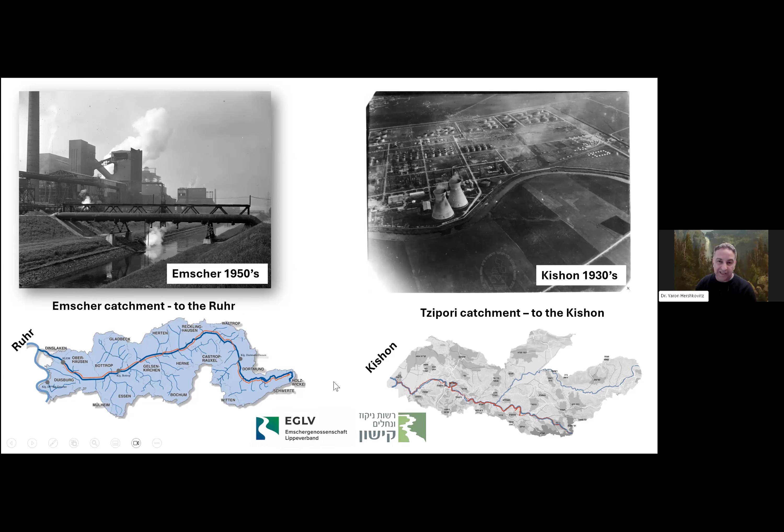אם אנחנו מסתכלים מקרוב יותר על החיבור, כאן רואים את האמשר שמתחבר אל הרור - זה בעצם החיבור בין שני הנחלים. תסתכלו מצד ימין, מה אנחנו רואים כאן? את הלבניות ואזור התעשייה. אנחנו לא נמצאים בקישון, למרות שזה מאוד מאוד דומה, מאוד מזכיר.

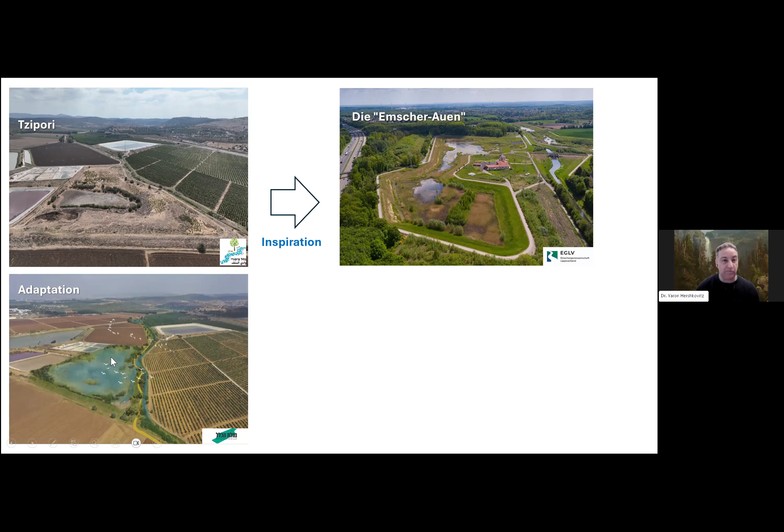ותסתכלו איזה יופי. מצד ימין אנחנו רואים בתמונה את מה שנקרא אמשר אוהן, שזה פרויקט שהושלם לא מזמן. גם כאן האמשר זורם בתעלה מצד ימין, קצת יותר מים, אבל ראינו כבר, אני באיזשהו מקום זיהיתי כבר את קווי הדמיון, ואמרתי, זה נראה מעניין, אולי נקבל מזה השראה. הצילום הזה, יחד עם חלק מהסרטוטים, עברו לצוות של הציפורי, בוצע איזשהו סרטוט רעיוני שמתבסס על זה. הנה, אפשר לעשות משהו דומה אפילו. לא באותם סדרי גודל, לא אותן איכויות, אבל אפשר לעשות משהו דומה.

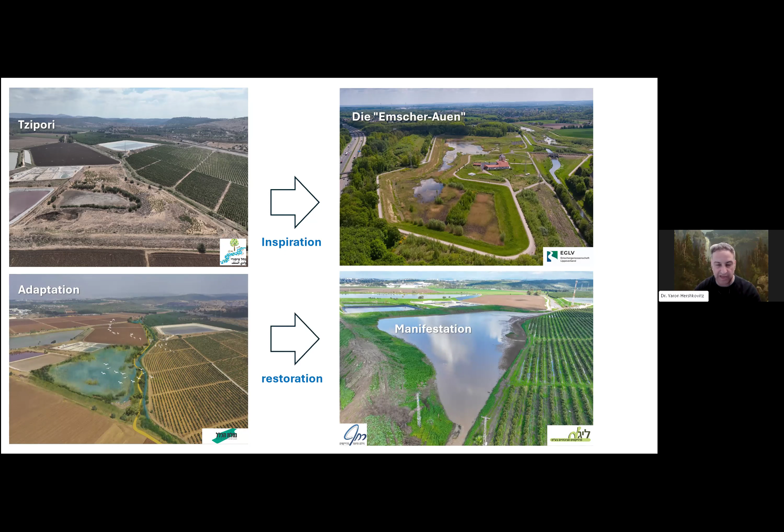ובאמת הרעיון קרם עור וגידים, בסופו של דבר יצא פרויקט - אני לא ארחיב על זה כי זה לא המקום ולא הזמן, למי שירצה יש הזדמנויות אחרות - אבל הנה, לקחנו השראה מפרויקט קיים, והצלחנו ליישם אותו.

אז זו דוגמה אחת, אבל כמו שאמרתי, הרעיון הוא בעצם להסתכל, לקבל השראה קצת יותר רחבה, ללמוד איך לקחו אזור כל כך מזוהם וכל כך מהונדס, ואיך הם התרחקו מה-engineered, מהפתרונות ההנדסיים, שזה מה שהיה, להסתכל יותר לכיוון של nature-based solution, פתרונות מבוססי טבע, ולהפוך את הנחלים ואת התעלות על הנחלים שהיו תעלות, בחזרה לנחלים זורמים עם מים נקיים.

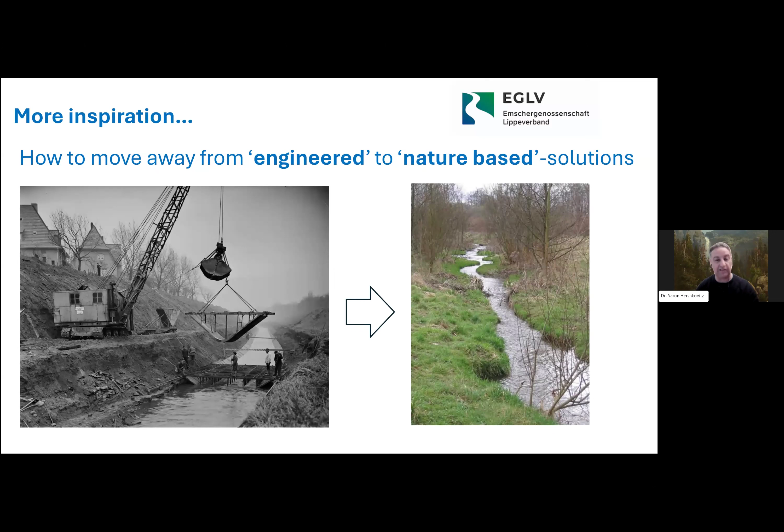זה יכול להיות גם החזון אצלנו בארץ, זה צריך להיות, זה כבר חלק, אבל איך עושים את זה בפועל? פה אנחנו גם צריכים להסתכל מה נעשה בעולם, ולשם כך, I'm happy to host you, my colleagues and friends, Dr. Mario Sommerhauser and Dr. Nadine Gerner, that will give us their insights and their point of view of how to do that, how they did that for more than 125 years. So I leave the stage to you. Thank you.

Thank you very much for the introduction, Yaron. From the pictures, we could also follow the comparisons that you draw. Okay, we also brought a presentation that I will share now. Mario? Yes, I'm listening, but I'm not able to start my video. It says the host has to start the video. If you want to see my face, but I think it's not. Now it works. Now it's working.

Thank you. Okay, yeah, thanks again, Yaron, and welcome to all of you. I have the honor to start this presentation, but we will change the speaker between, and Nadine will overtake later. So it's about the Emscher Basin, and it's also about the Emscher restoration, and of course about the Emschergenossenschaft, a strange word for our water administration company. Okay, let's start.

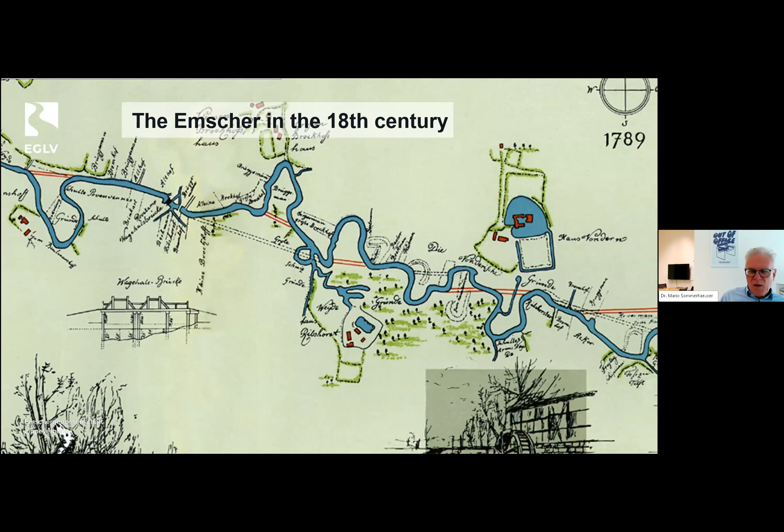The people thought in this period of time about rectification, straightening of the river for mills and shipping, but they were not successful. There were only a few people living in this area, in total 200,000. And this area is today the biggest agglomeration of cities and people in Germany and probably in Europe. Next slide, please. What happened?

In the second part of the 19th century, they started the steel production, and they found also hard coal in this area.

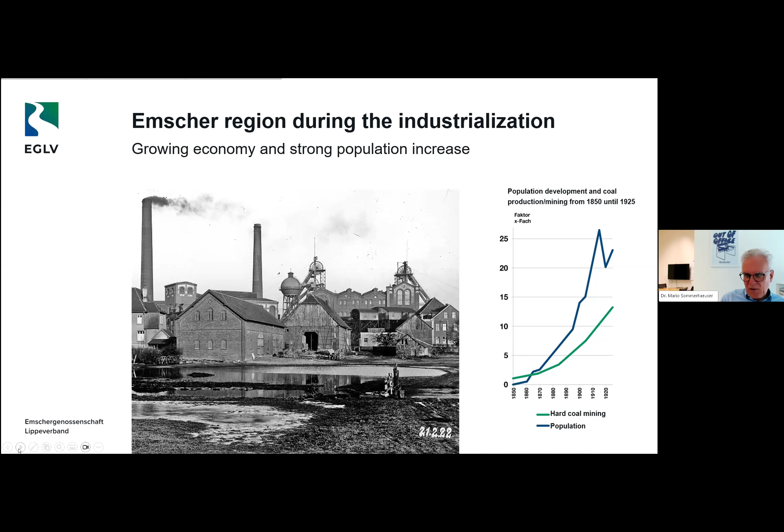Another picture shows the situation. This wooden bridge is not a solution for a moment—it's for the whole year.

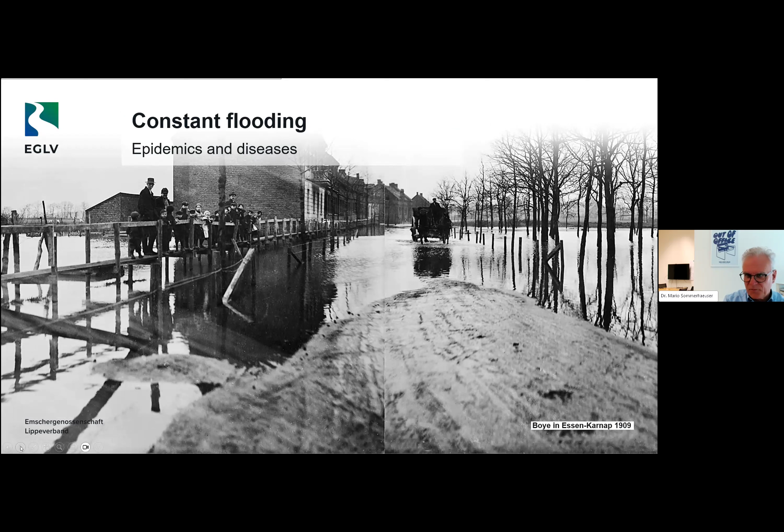At this time, the new cities in the area were not able to manage the situation on their own, which led to the founding of the Emschergenossenschaft in 1899—I'll come back to this later. The only solution to deal with this dramatic situation was to channelize all rivers flowing into the Emscher, as you see in these photographs, making them straight and fixing them with concrete to get rid of the wastewater and stormwater. Very pragmatic, but ecologically completely dead rivers.

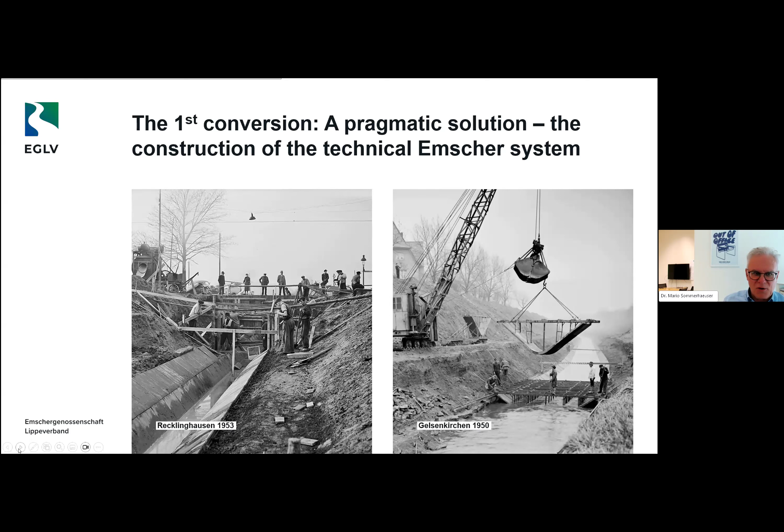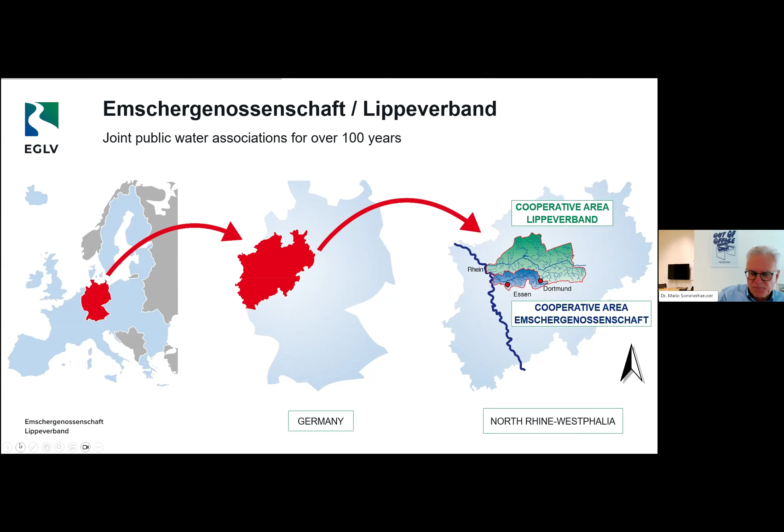This Emscher Water Association is a unique thing—it was founded by law. Not only was the Emschergenossenschaft founded by law as part of the public service, but there are several more water boards in North Rhine-Westphalia, our federal state, with the same history. The story behind this is that due to industrialization, they had to deal with many problems from coal mining, industry, steel production in the 19th and early 20th centuries. The solution to address wastewater treatment, drinking water supply, stormwater management, and floods was to found these water boards, and the Emschergenossenschaft is the eldest one. Together with the Lippeverband, we are the biggest public water management company in Germany.

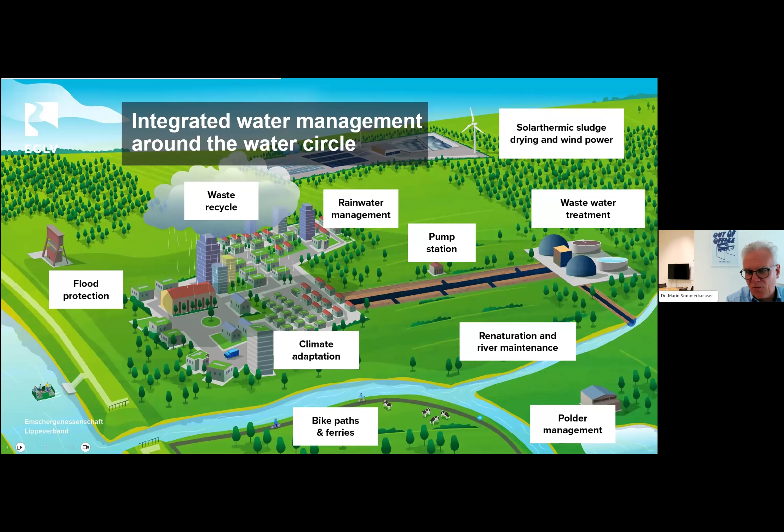Okay, now we can go on.

The Emschergenossenschaft is part of a corporation structure, which is really part of the region. The members are the municipalities in the Emscher area, the mining industry or the followers of the mining industry, because today we do not have any coal mining in this area. This finished some years ago, but the followers of the mining industry are members, and also commercial and industrial companies.

The municipalities have to be members, this is also written in the law. They have to be members of this water board, this German Genossenschaft, or cooperative in English. The Emschergenossenschaft is financed mainly by the wastewater fees of municipalities and commercial and industrial companies. We are also part of the environmental administration in our federal state. Our supervisor authority is the State Environmental Ministry.

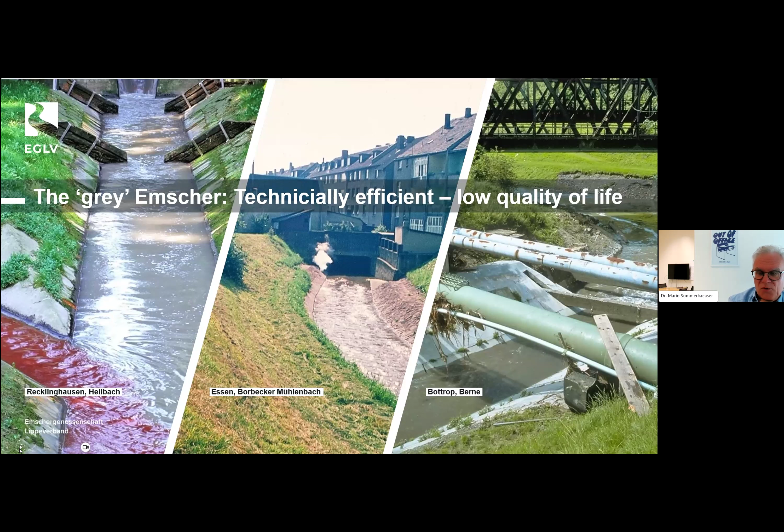Then in the late 20th century, there was the idea that we could not go on with a destroyed river like this with open wastewater. We wanted the region to be more modern, to be open for new inhabitants. And it was clear that the coal mining would be over in a few years or few decades.

The idea was born to go back from the gray, polluted and destroyed river to a blue, blue-green area, to make the whole region more attractive. We called it the second conversion. The first one was the technical conversion for the open sewer, and the second one is a transformation again to a blue river. The slides on the left at the top show you the last meanders in the floodplain area of the Emscher, and the technical solution.

On the right side at the top, very perfect, very typical German, over-engineered a little bit. On the left side at the bottom, the construction of subterranean sewage channels, and on the right side, the result, the freshly restored small tributary to the Emscher. One of many examples. It was possible to construct these subterranean sewers now because the coal mining was over, so it was possible to calculate the movement of the soil and geology better. This was the start to construct a new subterranean sewer system.

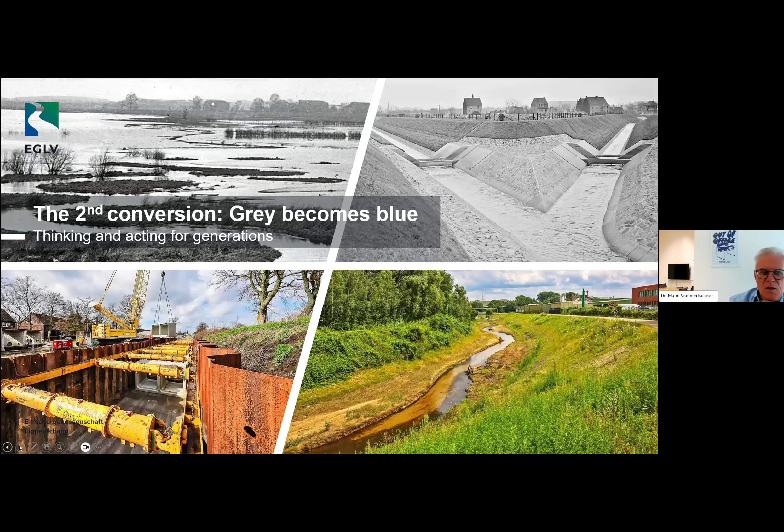This great Emscher conversion is probably the biggest restoration project all over Europe. It's at least the most expensive one. On the left side you have some information: first was to construct more than 400 kilometers of new subterranean sewers, then to restore 330 water bodies, and the construction of 4 decentral wastewater treatment plants in the early 1990s.

At the moment, we are improving these wastewater treatment plants. We are adding a 4th treatment stage, as we call it. This means treatment facilities for specific chemicals, micropollutants, hormones, and so on. The overall budget for this is 5.5 billion euros. That's really a lot of money, but you have to keep in mind it's spent over 30 years.

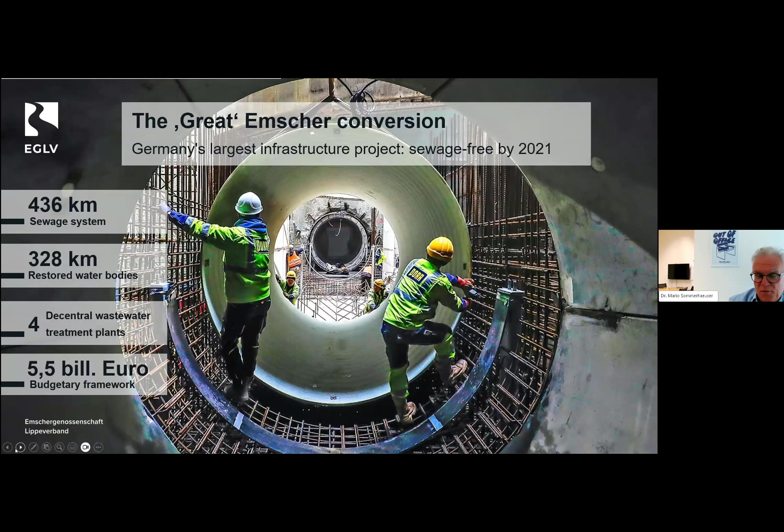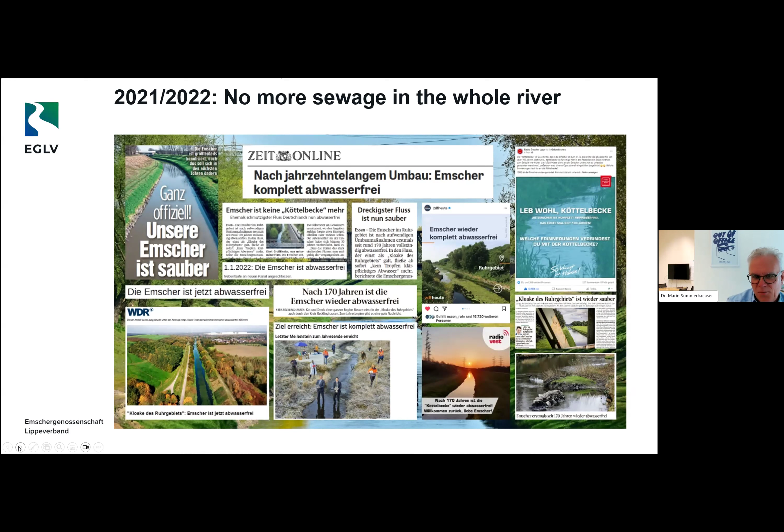At the end of 2021, the whole system was free of sewage, completely free of sewage. It was all in the subterranean pipe system. This was the first great success for the Emscher and the tributaries—many of the tributaries were of course free of wastewater before, but this was the important point when the main river, the Emscher, was completely free of sewage. You see all these headlines in the newspapers. It was a big headline for the people, positive news.

Here, just one example: Nadine and her team are monitoring the situation in the Emscher, the water quality, by different monitoring methods. One of them is 24/7 monitoring by about 8 stations, which round the clock measure the quality of water.

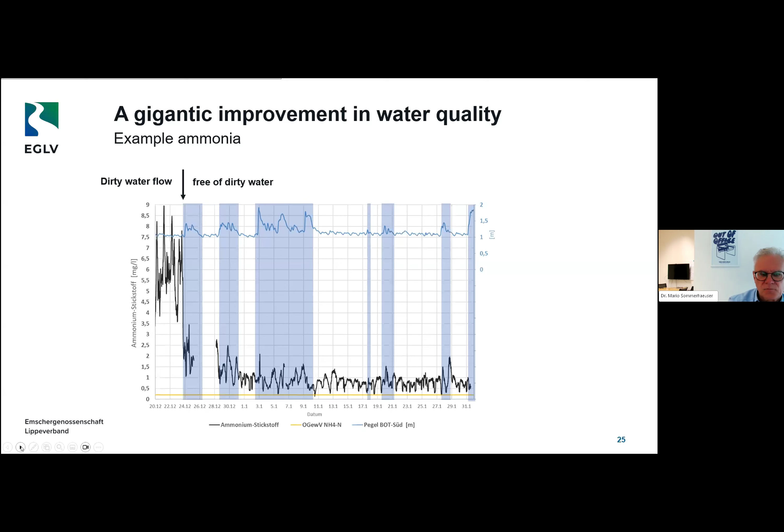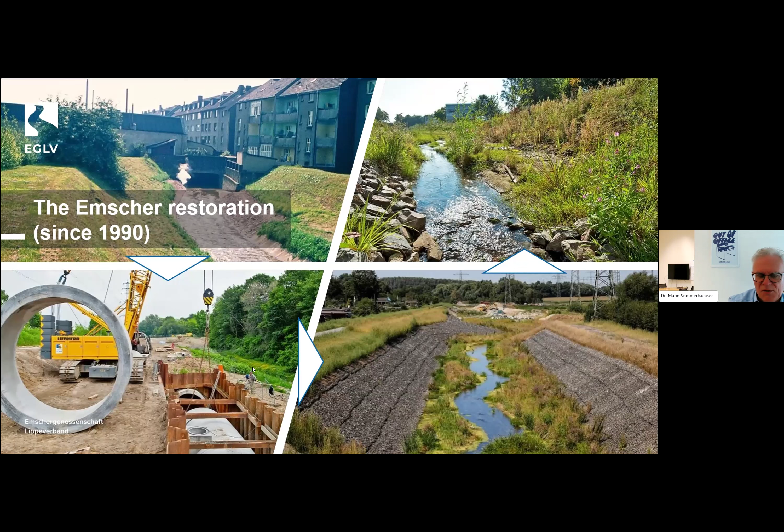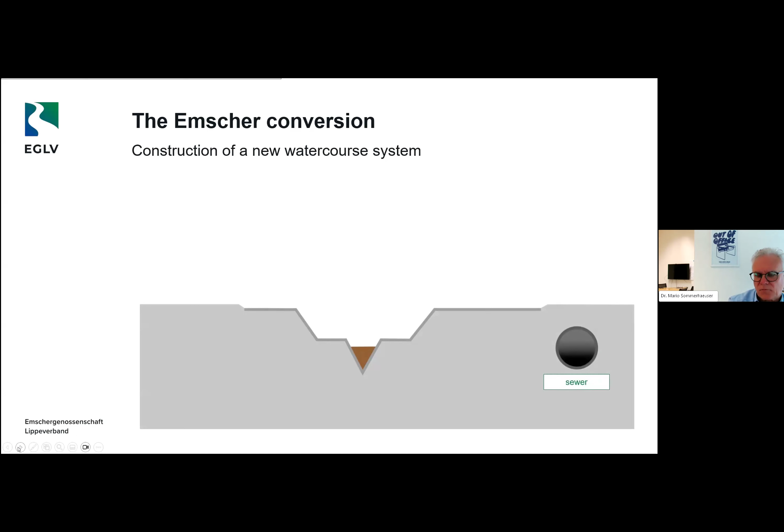The construction of the new water course system always follows the same steps. In this slide, you see a typical technical cross-section of a wastewater stream. First step is to put the wastewater in the subterranean pipe, as you see here on the right. Then we can widen the cross profile, the cross section, but we cannot move it more up to the surface, as I mentioned before. But the river now has enough space to do its own work, to have some dynamics, and that's what happens. Usually along the bicycle path, you can't really see it, but you know you're driving on the new sewer, and on the other side you can see the new river.

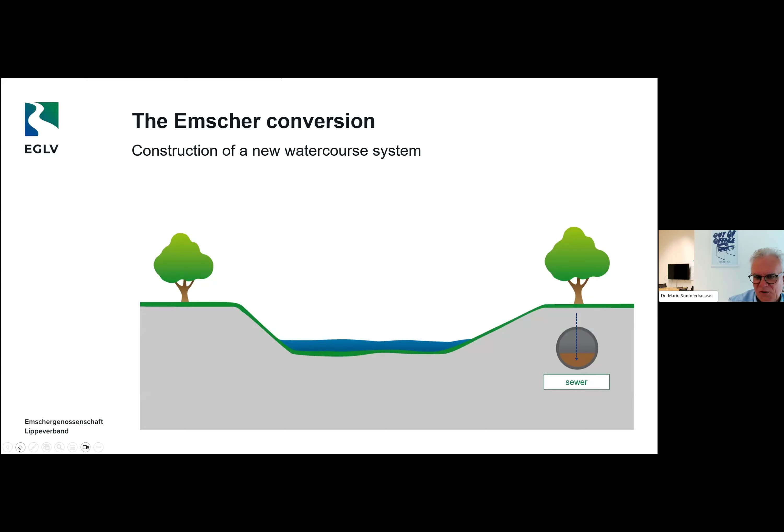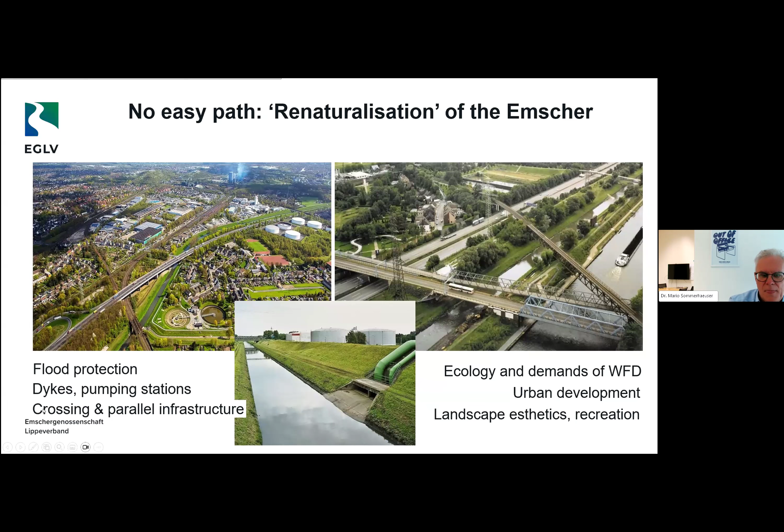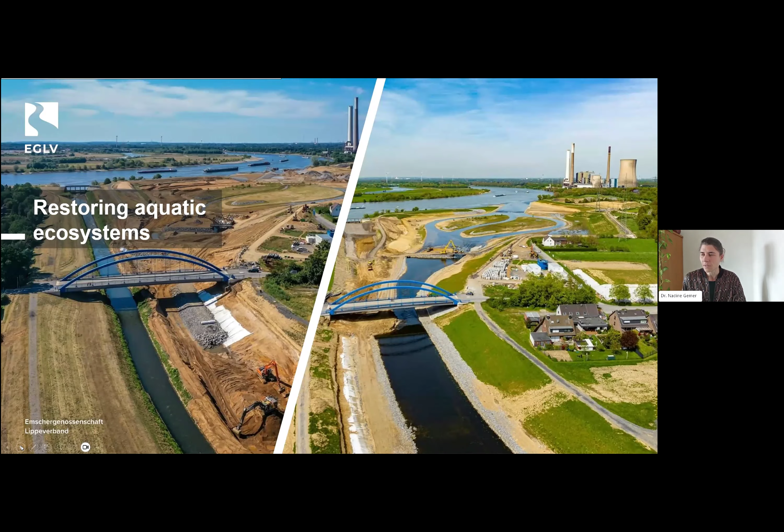In the subsequent year, we did a monitoring of species, including both aquatic and terrestrial species, also plants, animals, all kinds of species, and we came up to a number of more than 800 species in this area. Here you see a picture showing the function as a flood retention area or flood retention basin, both for the Emscher water, but also for the Rhine water using this retention area.

Another site is the flood retention basin in Dortmund, more towards the source of the Emscher River. The Emscher is still a bit smaller, but large enough that during floods it increases a lot in size, and there's a risk of flood, especially with climate change and more intensive rain events happening here. So two additional flood protection basins were constructed in a near-natural way, trying to make them as near-natural and as multifunctional as possible.

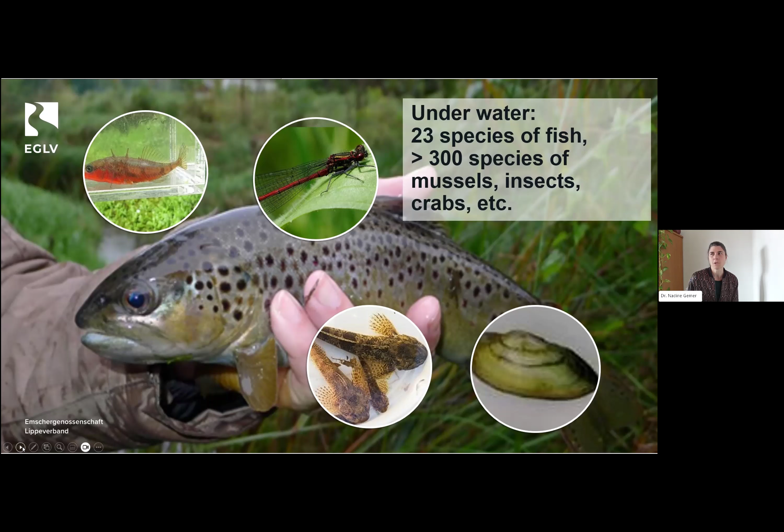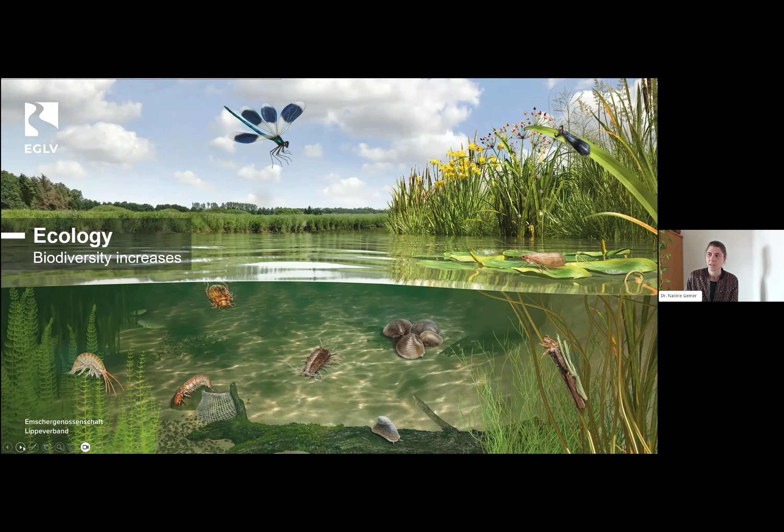Invertebrate species are a bit more difficult to communicate the value of, but with the concept of the feeding net, the functions of ecosystems and ecosystem services, and as I said, these public monitoring days, we can show the need for these species to return to the rivers.

The beaver is a bit of a special animal in terms of public perception. People are also kind of scared of the beaver returning because it's very active and changes the landscape. In the Merlin research project that Jaron mentioned in the beginning, there's a special case study on beaver activities and their functions in terms of water retention.

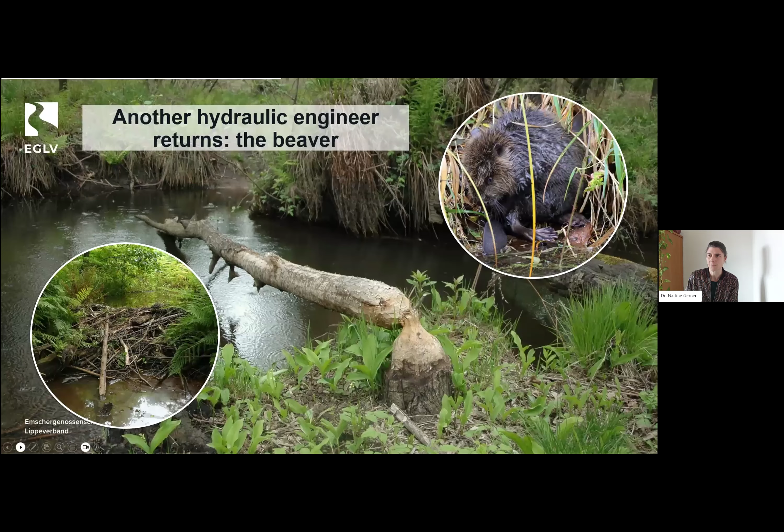We are focusing not only on the aquatic ecosystems, but also on the shorelines and the areas surrounding the streams. So one main aim is to increase biodiversity and to change the management of all these areas to a more sustainable, more biodiverse way, and also to highlight the ecosystem functions and services that this brings.

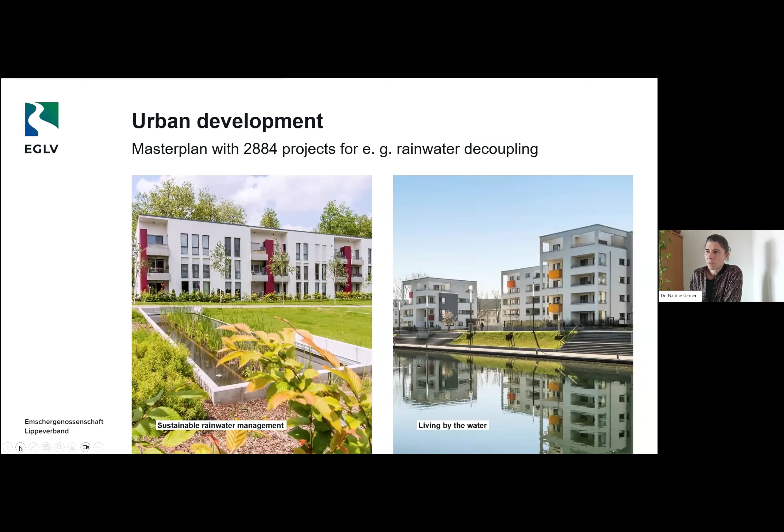All this is part of the master plan, and it also feeds into the economic value of the Emscher restoration. Mario mentioned the costs needed for all these restoration activities, for the construction of infrastructure and for the restoration of the rivers. But these activities also give a financial return, which sums up to 13 billion euros and more than 40,000 jobs linked to these tasks.

To slowly come to an end, the last chapter here is about climate adaptation. We are also experiencing more severe events of heat and drought, streams falling dry, and on the other side more extreme rain events that lead to flooding of cities. Here too we highlight nature-based solutions as the way forward.